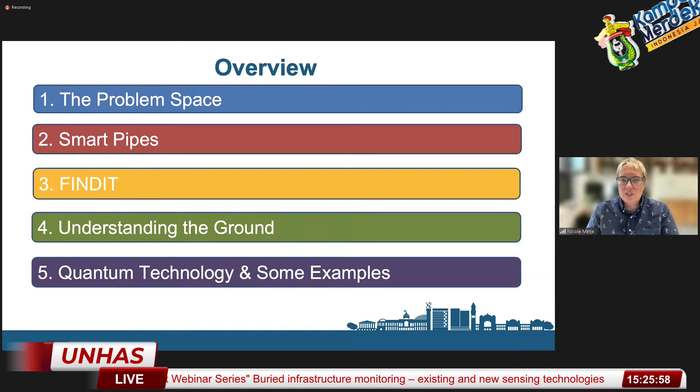But finally, coming over to my actual talk - I start off with the problem space, trying to explain what I'm interested in, because not everybody might appreciate what it looks like below the ground surface. Then I talk about a project we did a few years ago called Smart Pipes, where we looked at using existing sensors in a completely different way. We then did something called FINDIT, which was quite a clever play on the acronym, but again, it was about finding buried infrastructure.

But it's not just the infrastructure itself, it's also trying to understand the ground. And I'll finish off with some examples on the quantum technology sensors that I'm involved with.

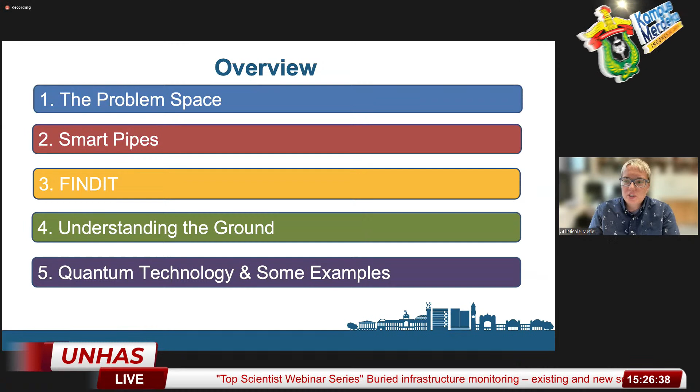But let me first start with what the subsurface looks like. If you go back to 1500, Leonardo da Vinci said that we know more about the stars above us than we know about the ground below us. This is still true today. That hasn't changed. So we are 500 years on, and we still know more about space, the cosmos, than we do what's below our ground.

And I'm one of these people who tends to take pictures every time there's an excavation. These are some of the pictures I've taken over the years. This is just focusing on pipes, and my research is much broader, looking at other things that are in the ground. But if you look at the pipes below there, you can start to appreciate how complex this is.

So if we go back to the medical analogy, none of these pictures show keyhole surgery. They actually all show really invasive surgery, i.e. we're opening the ground. The problem with this is that you're incurring quite a lot of problems at the ground surface, because it generally means these pipes and cables are laid in the street. So you have to close your roads, you have traffic jams, congestion, cars driving down roads they're not really designed for, causing secondary problems.

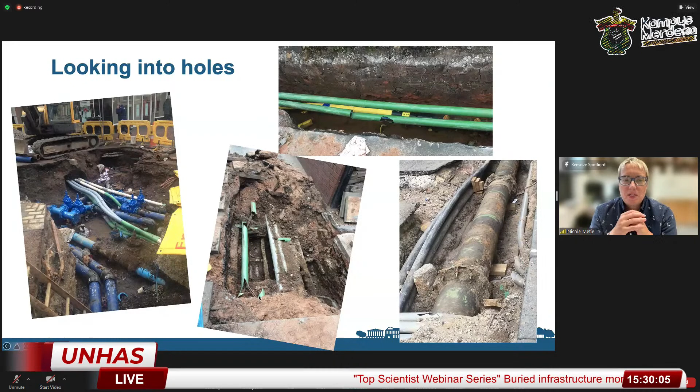The problem with that is we are currently in the UK rolling out a lot of our broadband fibers. The way broadband fibers are rolled out is they are blown into the conduit, into the duct. But you can't do this if you've got this offset. You can't just blow the fiber down. So you have to do that excavation like they've done here. You have to repair it, close it up again, then try and put your fiber in. But that can be quite complicated. The FINDIT project specifically focused on exactly that.

The other problem you see here, this is actually a gas pipe. So this is actually quite scary. This is a gas pipe, but you also see the surface here, this is the pavement. So you see how shallow the gas pipe is buried here. That means if you do any excavation, you really have to know very accurately where your buried assets are, because otherwise the risk of damage is significant.

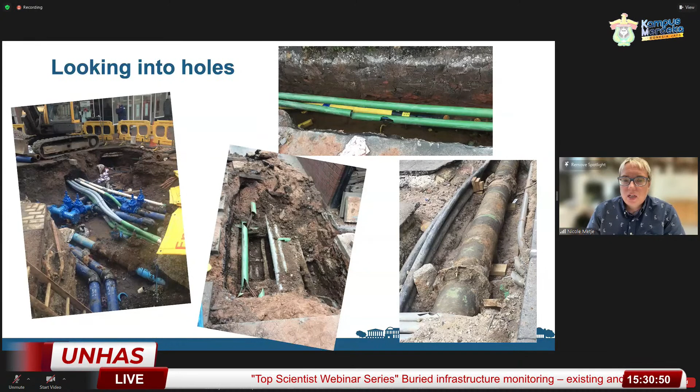And actually, in the UK, unfortunately, we know that around 5 to 6 people lose their lives or are seriously injured every year because they damage or hit a buried asset. So that's a really sad fact, and we really want to avoid that going forward. But you can also see these cables are electricity cables, and this is gas. So you don't really want those close to each other.

So you can see how in practice, this is not how it was designed, but in practice, people actually lay it. There's just a bit of brick, a bit of wood to just separate those out as much as possible. Clearly not a good way. You can also see here are some more conduits that are just broken off when that excavation happened.

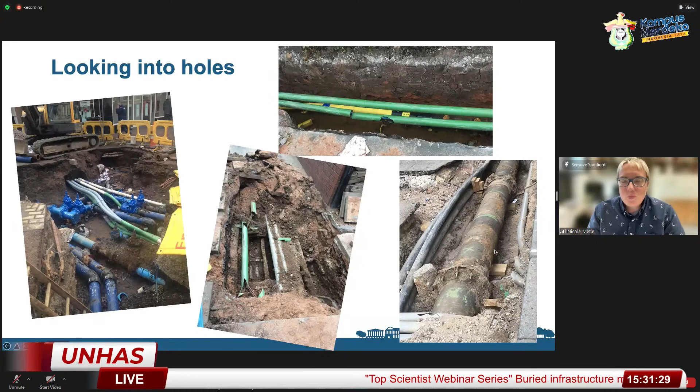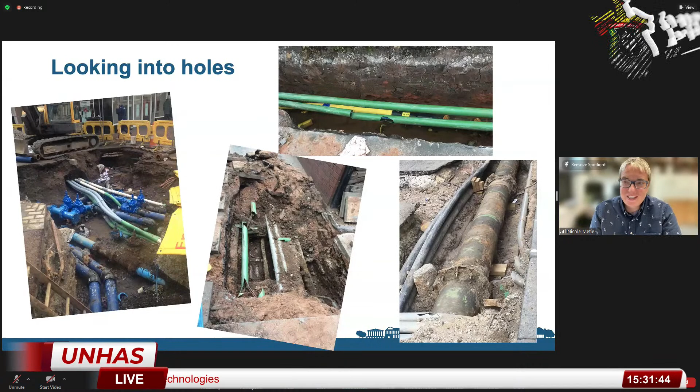So I'm one of these people, wherever I am, in whatever country I am, I take pictures of holes. That might not be a good fact about me, but I do it because I want to see whether it's different in other countries. I'm sure maybe you can send me some pictures of what it's like in Indonesia for some of the excavations.

But coming back to my pipes - this is a district heating pipe. It doesn't actually matter what it is, but most of our pipes are in the ground. Even the newer pipes we lay don't have any sensors on them. We call them a dumb pipe - they don't tell you anything about how they behave or where they are.

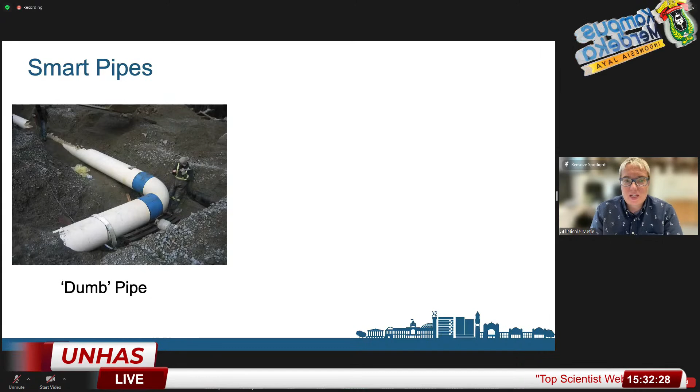Most of our pipes in the UK are actually 100+ years old, and this is where we are now starting to struggle with condition management and trying to look after them. So one of the projects we did, we said what we really need is to have sensors on this, because we need to be able to monitor the performance of our buried infrastructure, ideally from the surface without having to excavate, so we can make our assets last much longer, or intervene much more proactively before any severe damage happens.

So we said what we need is to add sensors and add communication. The principle of what we came up with is that we have our pipe in the ground, we've got our sensor nodes, and they can communicate with each other, but they also communicate to a master node, which is probably also in the ground or just above the surface. That then communicates to a cloud and can send you information out.

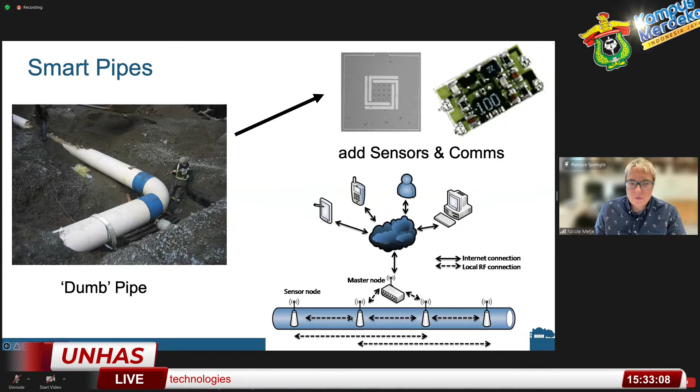The key idea was that if these can communicate with each other, we only send the information to the master node if a change happens. So if everything is in the green zone, we don't even inform anybody that there may be a problem. We record the data, but we don't pass the data on. So that was the theory.

So what did we do in practice? We developed something, but we had a few requirements. We wanted a sensor that was non-intrusive to the pipe structure. What we mean by this - if you've ever seen a pressure sensor, it's a tapping, you actually screw it into the pipe, which damages the structure of the pipe. We said we don't want that.

We needed something that has enough accuracy. We needed something that was simple from a signal processing viewpoint, which had a wide range in terms of communication, but also was low cost.

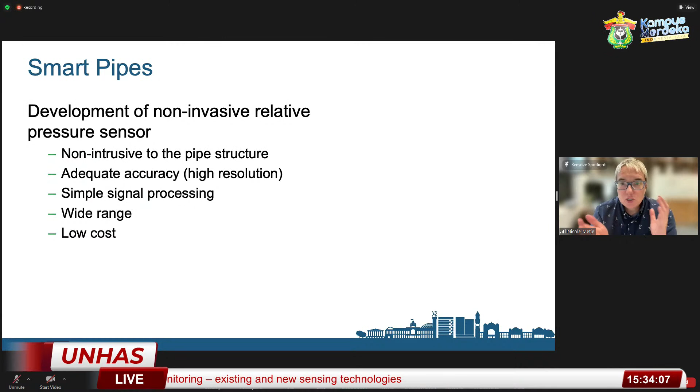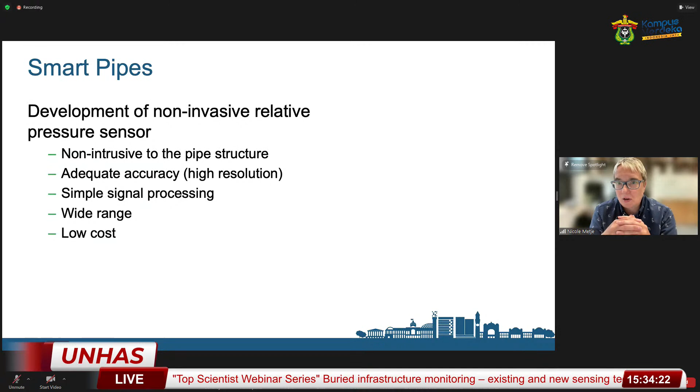Because one of the challenges we have in the UK is that water is cheap - that may change with climate change now, so this may all change in the future, but at the moment water is cheap. I mean gas is no longer that cheap, but certainly water is cheap. So if you add sensors and they cost hundreds of pounds or hundreds of dollars, it adds a significant cost to the supply of your water, and water companies wouldn't want this.

So what we basically found out is you can have a force sensitive resistor, or FSR sensor. The blue one is our pipe, which has pressure because you've got pressurized water in the pipe. You have a sensor and you have a clip on the outside. The sensor was very simple.

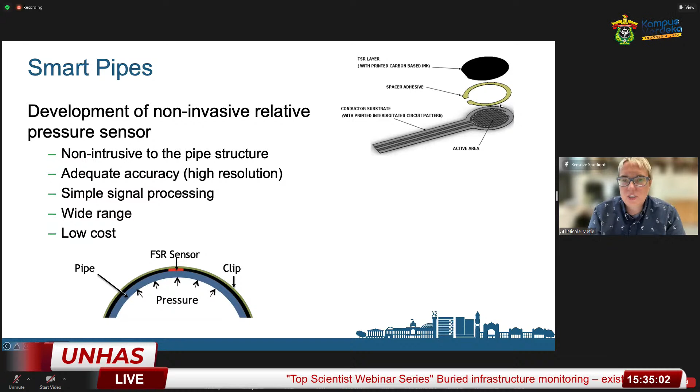This is what the sensor looked like. It has an area here which basically has a layer and a spacer, so a conductor. When it presses down, it connects your conductors and you've got some electric current running through, and you can measure this electric current.

So in practice this looked something like this. This was in the laboratory. We had a so-called Jubilee clip, just a strap around the pipe, and we had a sensor just underneath here - this bit is the sensing area, not the bit that you see at the back. So that was the principle.

These FSR sensors cost less than $1, and we didn't need to do any tapping. The only challenge is that you need to reach the whole circumference of the pipe, but we looked at alternative solutions for that as well.

One thing we did is we didn't just do it in the laboratory, we actually also did it in the field. The one thing we didn't practice or try in the field, and it's still proving a bit challenging, is that we still had a cable. We still had cable connections. In an ideal world, we want this wireless.

So we worked with one of our water companies, and in this case, we actually did a bit more for keyhole surgery. This is a vacuum excavator, which basically sucks the soil up into its drum, and otherwise it either takes the soil away or it most likely puts it back in the opening.

So here you can see the pipe, and you can just about see the cable clips. As you can see, you've got water because it's quite wet in the UK, so you've got the cable clips attached. One of the key things is we had our pressure sensor, but we also had some temperature sensors, one very close to the pressure sensor on the pipe, and one further in the ground. We also had some vertically in the ground as well.

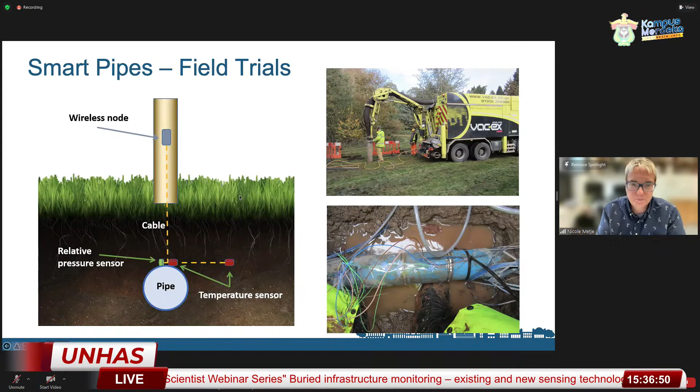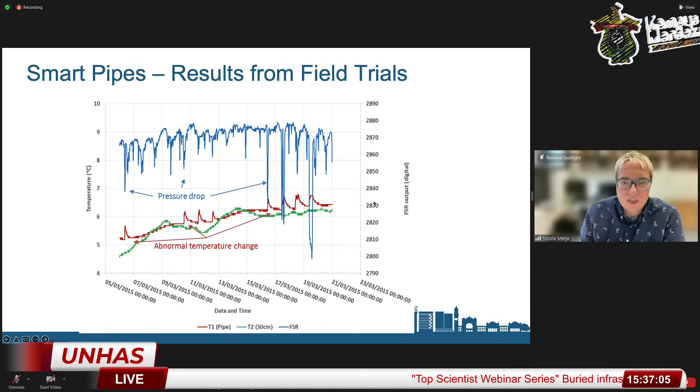So what this shows is a slightly complicated figure, but I'll try and explain this. On the x-axis here is time. On the y-axis here is temperature, and this is the FSR output. There's just a digital output, don't worry about the units. It's just literally what comes out of the digital converter. So it doesn't simulate a pressure or anything like that — it's not converted to pressure, that's what I'm trying to say.

So what you can see here, the green one is the sensor that was 30 centimeters away from the pipe — so the green one is this one. And the red one is the one that's on the pipe itself. And here you've got your pressure sensor, and you can see it's quite noisy, but it has these sort of drops every now and then.

The idea was that we could relate our pressure drops to whenever there was a change, an abnormal change in temperature. You can see there's a temperature change, and this occurs because when you have a leak, the water rushes through and you get different temperature water in the pipe. That's why you get a slight temperature change. The idea was that we could combine the temperature change with the pressure signal.

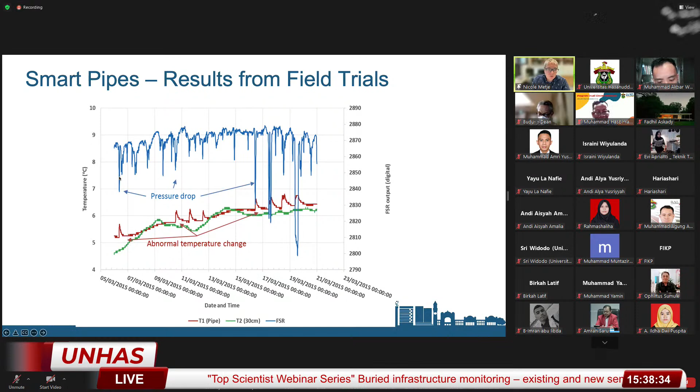So whenever we had a temperature change as well as a pressure drop, those were the times when there was a leak. So we induced a leak into the system, and we could measure this. And this was actually really successful because these points do actually show at times when we induced the leak. So whenever there was an abnormal temperature change which also coincided with a pressure drop, that's when the leak was that we induced. That gave us confidence that this system worked.

So as part of this project, on the sensing side, we developed this non-invasive relative pressure sensor — so it doesn't measure absolute pressure. If you want the actual pressure in the pipe, you still need a pressure tapping. We also developed a sort of node design, and we looked at an installation.

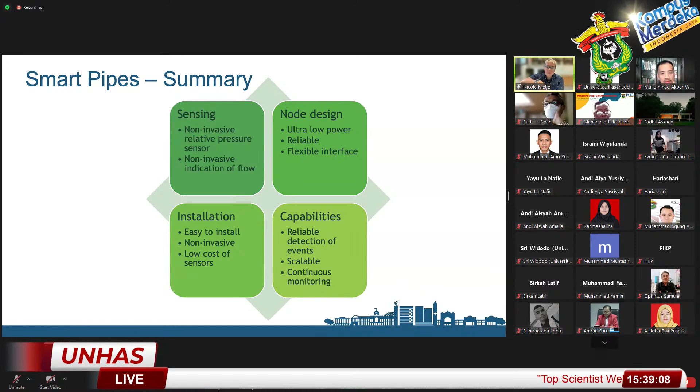So the Jubilee clip idea is really cheap, but we ultimately also looked at a clamp that we can put on the surface, so we can go in with keyhole surgery. We literally just have a hole rather than a trench. But it was really reliable, and it was cheap, and it was scalable.

Obviously, in the talk, I don't have enough time to go into a lot of details, so this is just a summary, and if anybody's interested, I can share these. This is just a summary of the various papers that we published based on this project.

This paper, our last one in 2018, is really the summary of our field trials, so if you're interested in the field trials, that's really a good one. Some of the sensors and actuator papers are looking more at the design of the system, but also how we can communicate through the ground.

One idea we actually had, rather than having something on the outside, is also whether we can include microchips or nano sensors into the pipe material itself. There's a paper here, and there are more than that one. This is our first concept paper that we did now 11 years ago. Most of these are open access, but if you're interested, as I said, I can hand them out, I can share them.

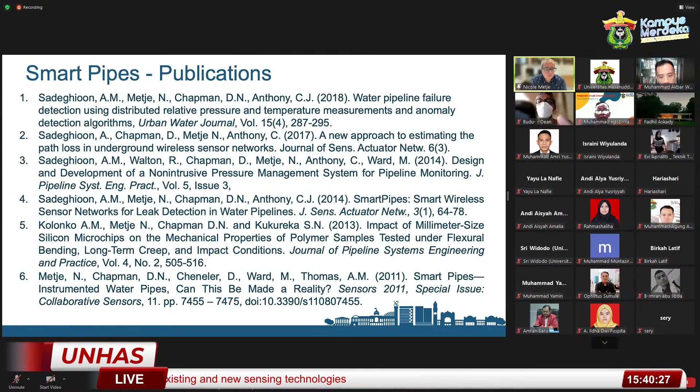Coming to the next project, which was FINDIT. That's something we did with industry, together with British Telecom (BT), as well as RSK and Geomatrix. This shows that we're really looking at industry problems and trying to address industry challenges.

I've already mentioned that in the UK we're rolling out broadband communication, putting fibers in and getting rid of the copper cables. But the way they do it is they open an access chamber, see the conduit, and try to blow it in with air, blowing the fibers through. That only works if there's no blockage in the conduit or no offset in the conduit.

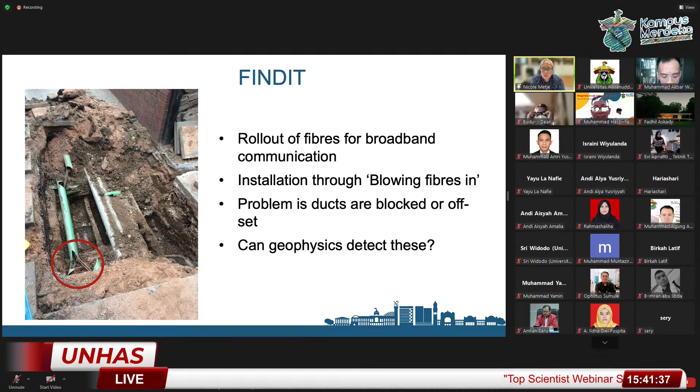So the question was whether geophysical sensors from the surface can help find any blockages or offsets, so that you can address this before you get on site and before you try to put your cables or broadband fibers in. I'll show you this video because I think it gives a good impression of what this was all about.

This is focusing in on our test site at BT.

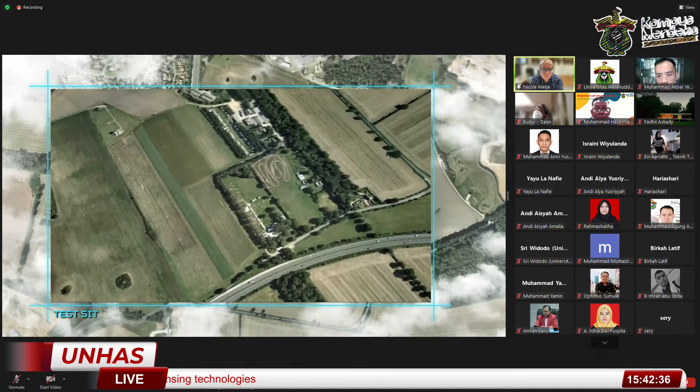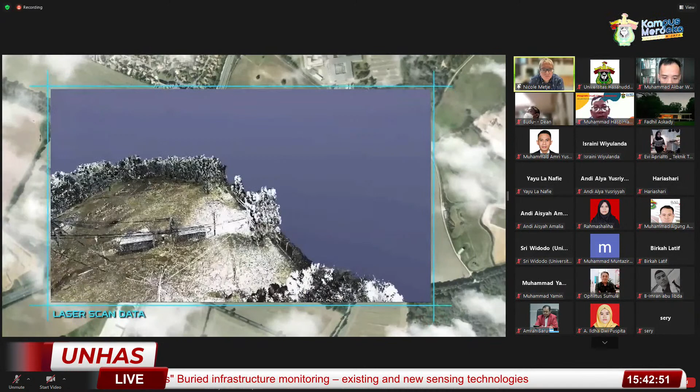One of the things we did was a laser scan of the area, so we have a good digital terrain model. This is just standard geophysical equipment we used to collect data on what's actually in the ground, because even though this is a test site owned by the company we're working with, that doesn't mean they know exactly where their buried assets are.

One of the sensing technologies we looked at was ground penetrating radar. You can see it move up and down—it's obviously a time lapse, so my colleagues don't move that fast.

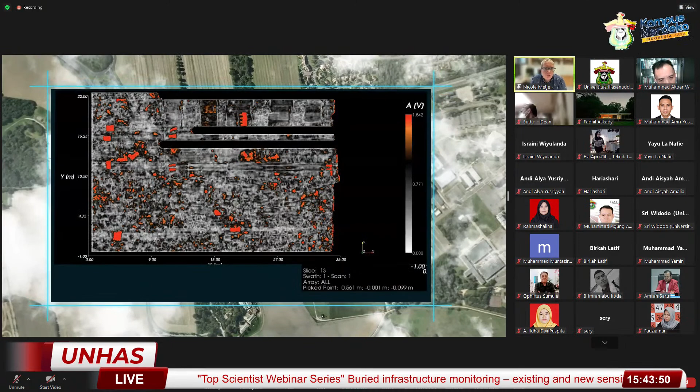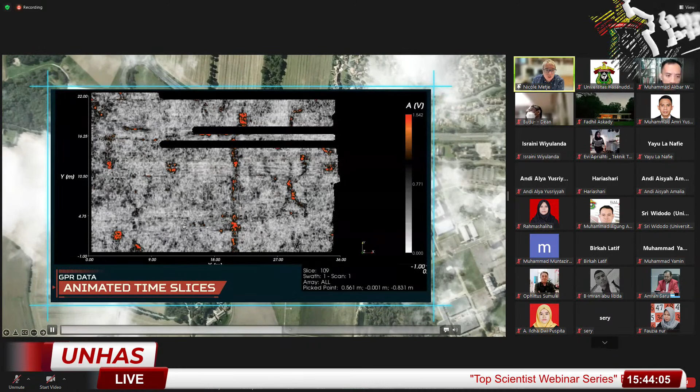Here are some of the results, and you can see how difficult it is. These are animated time slices that go through the different depth layers, and you can start seeing at different depths that some pipes appear—so there's a pipe, and there was one earlier which went along here, which you can just about still see. That's all the services that ground penetrating radar detected.

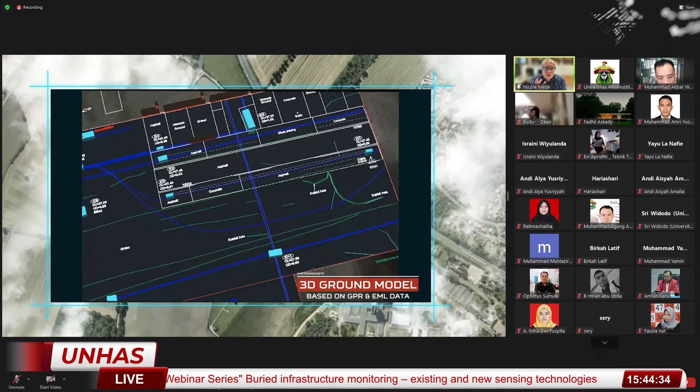We then did some CCTV, because one of the things we were interested in was looking at blockages. Since this was our test site, we needed to know what the status quo was so that we could benchmark against it—basically the ground truth.

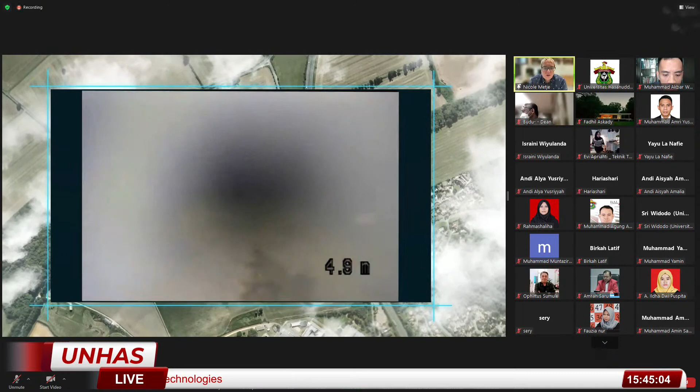So this is a typical CCTV image. I have to say these are very clean pipes—this is not the quality of image you sometimes get—but you can see that there's a partial blockage detected here by the CCTV camera.

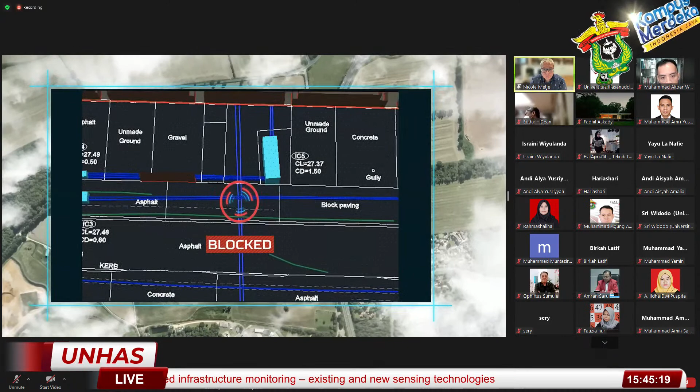So one of the things we then did was use the site itself and look at some blockages, but being in academia, we want to really have control over our tests. So we actually installed our own test site, with a total of 5 ducts with different defects.

One defect was an empty pipe, but we also had mobile partial blockages, which I'll explain on the next slide. We had some holes drilled in—some left open, some taped up—because if you have clay surrounding, it can actually feel as if you have a clay pipe, even if your main pipe is damaged.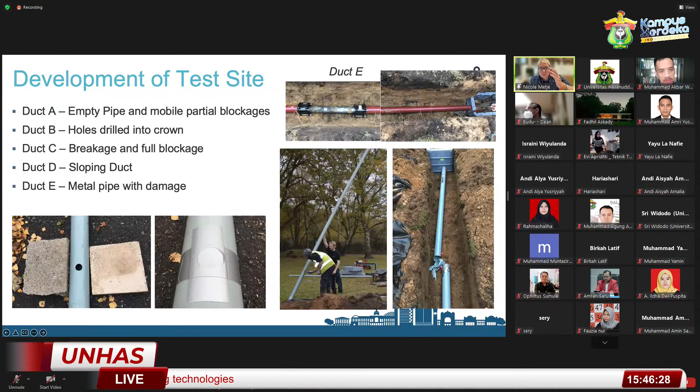We looked at breakages, something like this, to see whether we can detect this. We looked at changes in material, from plastic to metal, and we also looked at changes in depth. I should say the conduits are quite shallow in the UK—around 300 millimeters.

These were our partial blockages—we literally had cylinders filled with soil of different diameters. If this was our pipe, we literally dragged our soil cylinder through it, simulating different blockages at different positions. These were up to 60% blocked, and the idea was: can we still detect them from the surface?

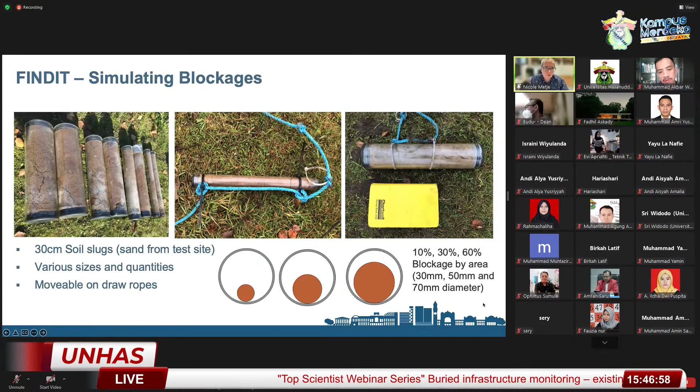As it says, this was 100% blockage. So the question was, could we also detect smaller blockages? We then did a bit more simulated data to see whether we can detect a smaller blockage.

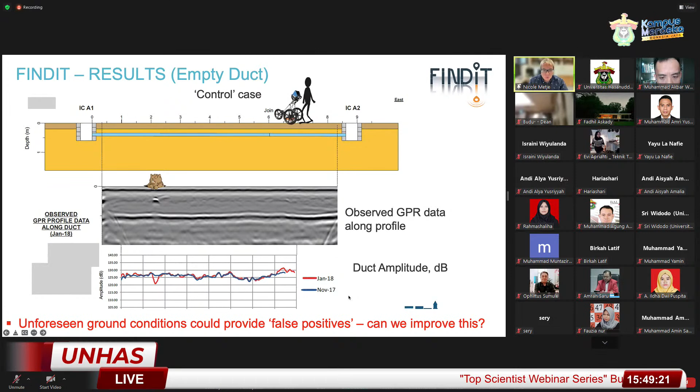We then also did some of the acoustic tests. The acoustic tests work slightly differently. You do need to have access to the end of the duct through a chamber, but you still don't need to excavate. You just need to get to the end of the duct.

As you can see, this is clearly not an industry prototype, this is a research prototype. You can see all the cables, but it's nothing really different to a speaker that we put at the end of the duct, a clever speaker and a clever sort of microphone, and we listen to the return signal.

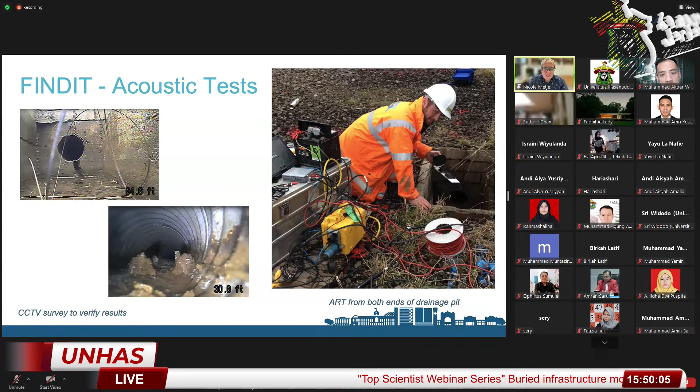We did this for quite a number of pipes. We also had quite a long one. This was at the surface to a certain degree for the proof of concept test. It doesn't actually matter whether it's in the ground or above the surface. What you can see here is quite a lot of connections as well.

And the question is, what can we detect when we do our acoustic survey? We had a bend as well.

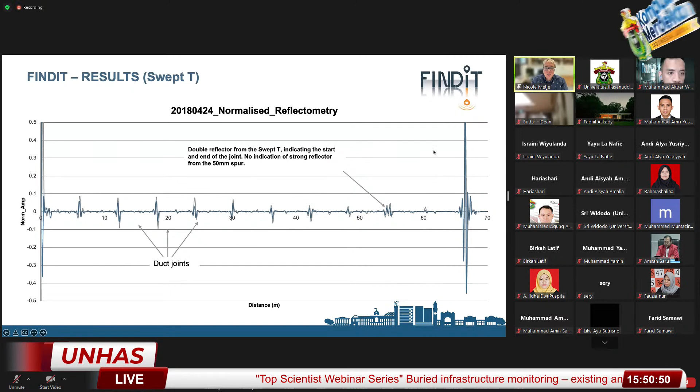There's a lot more in the technology that I don't have time to cover in this talk today, but you can see that you can detect the duct joints, so where it's joints, you can see this in your reflected signal. You can also see the end of the pipe as well. But this is just indicating that on this occasion, there was no blockage.

So the idea still is, if you go in before you try to put in your fiber and you understand the underground environment much better, you can either do repairs before you try to put in your fibers, or you know whether there is an issue. And this has a real advantage because you can plan your jobs much better.

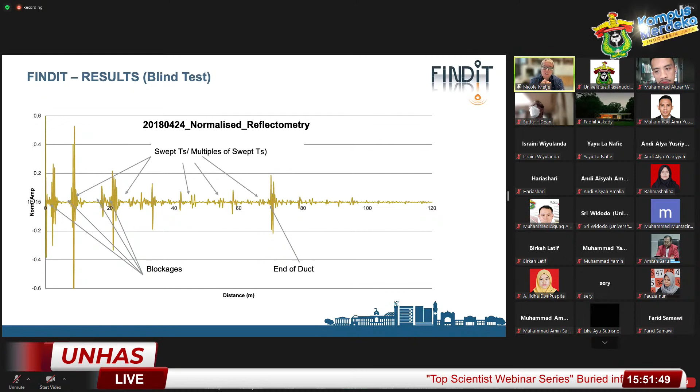The way it currently happens is somebody comes on site, wants to blow the fiber in. If they can't blow it in and there's an issue, they go away from the site, they call a different team in, the team repairs it, repairs one area, they go back, try it again. If there's another bit that's blocked, same situation, the person or team that tries to blow in the fiber goes away, brings in another team to repair.

And that takes a lot longer, causes a lot more congestion on the ground surface, and has a lot more impact on everybody driving around generally.

So to summarize what we found: we've got in-duct acoustics and ground penetrating radar. In terms of locating the duct, you can do that with ground penetrating radar - this is something industry does day in, day out. In terms of partial blockages, we can certainly see that with the in-duct acoustics, but we're struggling with the ground penetrating radar. If we have a full blockage, we can see it with both.

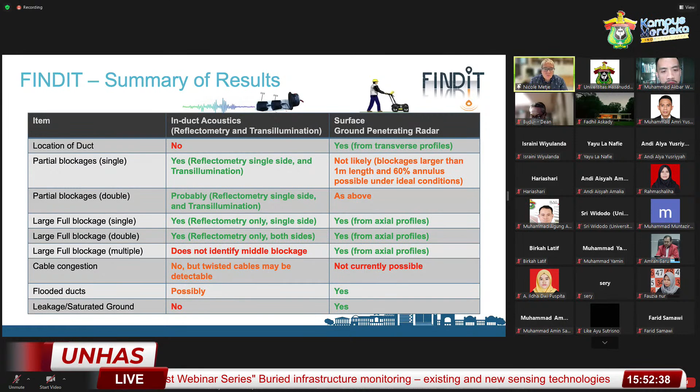If we have multiple full blockages - so you have a stretch of pipe with multiple blockages - we struggle beyond two in terms of our acoustics, but we can see it from the ground penetrating radar. If there's what's called cable congestion, so if you've got different cables and don't quite know how much more space is in your conduit, we again struggle with either sensing technology.

If we look at where there's water in the ducts, because that's also important, we can do that with ground penetrating radar. If we're looking at leakage, mainly for water pipes - this was a bit of a site analysis - you can also do that with ground penetrating radar. But what this shows, and there are a few images later, is that it's a sensing combination that's really interesting and useful, and not a single sensing technology that addresses your challenges. We've got a paper out, which is open access, if you want to read more about this particular project.

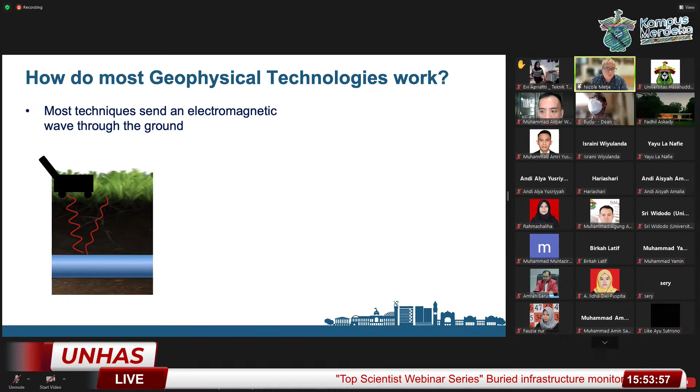Just going into how most geophysical sensing technologies work that I've been talking about. With ground penetrating radar, we're sending an active signal through the ground and looking at the reflection. The problem is that this electromagnetic signal is affected by the ground itself and by the condition of the ground, mainly the water. So if you've got water between your soil particles, that water can affect your electromagnetic signal quite dramatically - that's quite a significant problem.

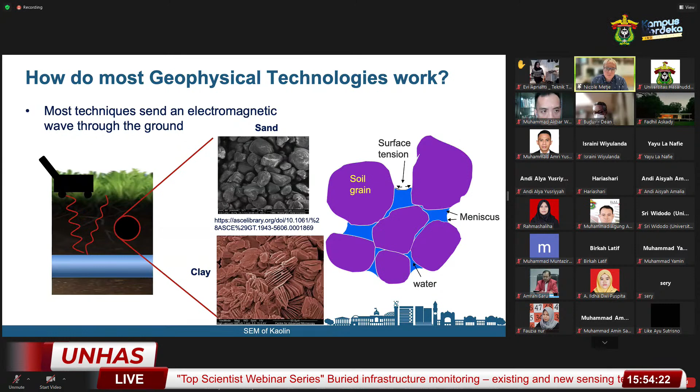It's really a problem because water is bipolar, a dipole, with electrons on the outside. The problem is that your electromagnetic signal has also got electrons on the outside, and they interfere, which basically means your signal can't penetrate so far into the ground.

As a result, one of the things we need to do is understand much better what our ground properties are - so water in the ground is really important. We've done quite a bit of work looking at different soils at different locations, both sandy coarse-grained soils and fine-grained soils. We've put in sensors called time domain reflectometer sensors, or TDR for short. It basically looks like a fork - a long fork, about 12 centimeters in length - and you poke or prod it into the ground.

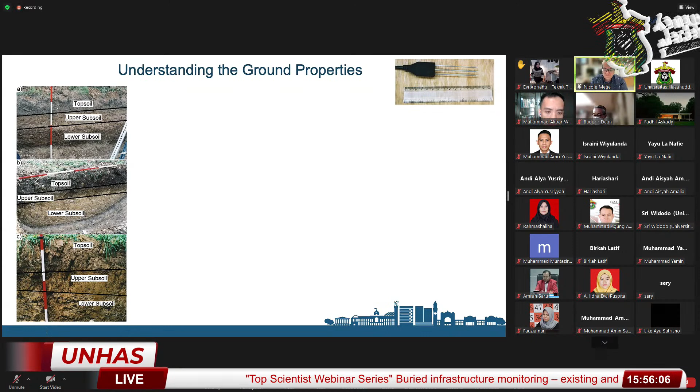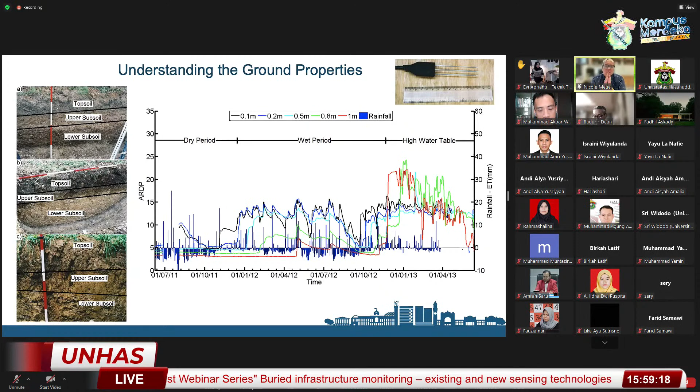I've got loads more information on these, so I won't go into that. This can be used as a proxy to give you in situ water content as a function of time. But the question is also, can we actually use this to detect leaks? Because what does a leak do? A water leak changes the water content in the ground, it makes the ground wetter around it.

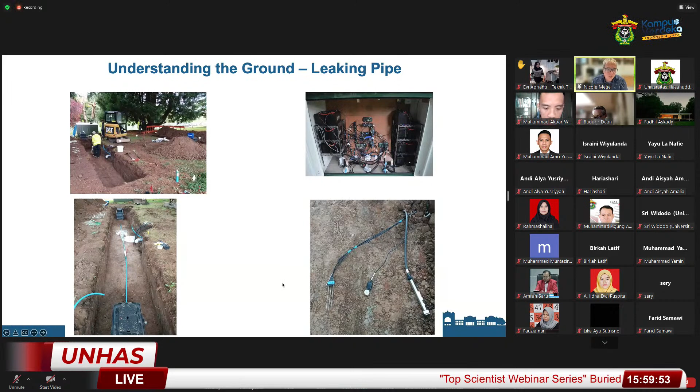So we use the same sensing technology. This is our simulated small pipe, a hose pipe, and we had a leak here. Here are our sensors, we used a range of different sensing technologies. We also did some laboratory tests to calibrate the sensors. We sprung a leak, this is just a trial. We actually did this while there was soil on top of it. And here are some results.

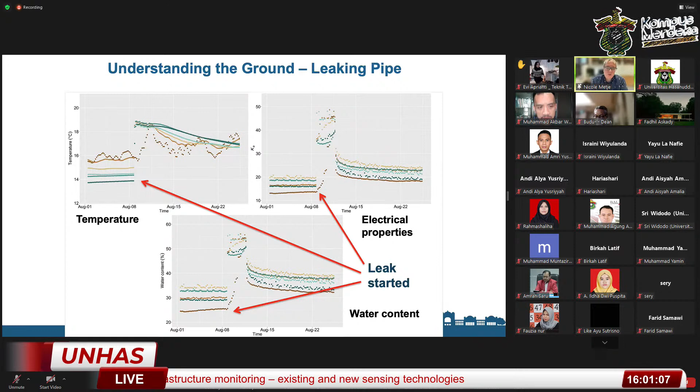This is really quite important because leak detection is a really vital aspect. I didn't mention it much about when we did the smart pipes, but water is precious, there isn't enough water in many countries. So having potable drinking water that leaks in the ground and we lose is not acceptable. Our water companies get fined if this happens, so they really want to know where their leaks are so they can go in and fix them. They don't want to know once the water's at the surface, they want to know before.

So finally, looking at the more novel geophysical sensors. A lot of this was existing geophysical sensors. Apologies, I just need to have a drink.

But even though there were existing geophysical sensors, it's not the way industry uses them. What we found is that there's a lot more information in the data from existing geophysical sensors than industry uses or gets out of it. We can actually work with the data and come up with some clever processing, clever modeling, and support industry to say, you've collected this data already, did you actually realize you can get this additional information that you can sell to your client? So in terms of our novel sensing technologies, it's really quantum.

Before I get to the quantum sensor, I'll talk about microgravity and the principles, because it's microgravity and gravity measurements that we do with our quantum sensor.

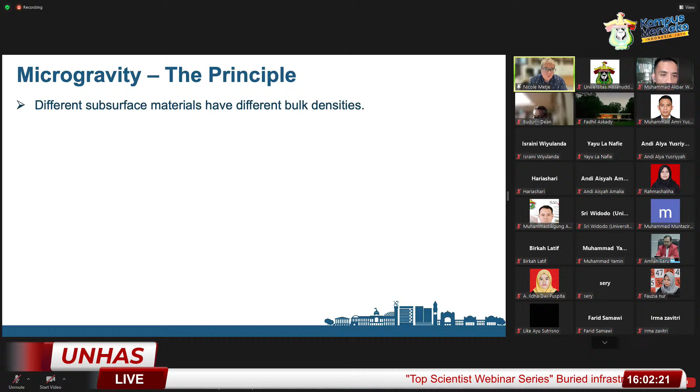One of the issues I've already mentioned is the soil. Different bulk densities potentially cause problems with a lot of geophysical sensors that rely on an electromagnetic signal going through the ground. In contrast, microgravity doesn't send an active signal through the ground—it's not a sensor you put at the ground surface that sends a signal through. It just measures the acceleration, or gravity, as a result of the Earth's gravitational field.

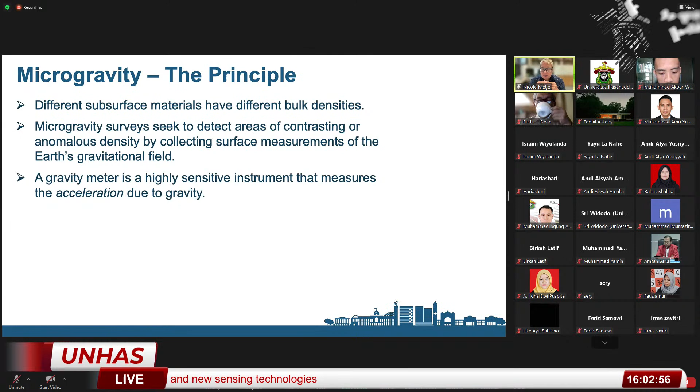So what does that mean? We normally have a highly accurate measurement that measures this acceleration. Classical gravimeters rely on a mass on a spring. If you have a dense material in the ground—think maybe a concrete foundation—your mass is attracted by that more. It expands the spring, and we can get some information about the acceleration.

If you have a void in the ground—could be a tunnel, a cavity, a big gas pipe—there's air compared to soil. So if you're over an area where there's a void, your mass is attracted less, and you actually have a negative gravity anomaly.

The problem we have with the classical instruments is twofold. One is that spring constant—it's very difficult to make them really accurate and all the same if you have a number of different instruments. The other thing is, if you've ever used a spring, maybe for structural analysis, you know it's affected by temperature. It dilates if it's hot, contracts if it's cold. That's problematic if you want to use the instruments over and over in different weather and climatic temperature conditions. The other challenge is creating test masses that are absolutely identical from one instrument to the next.

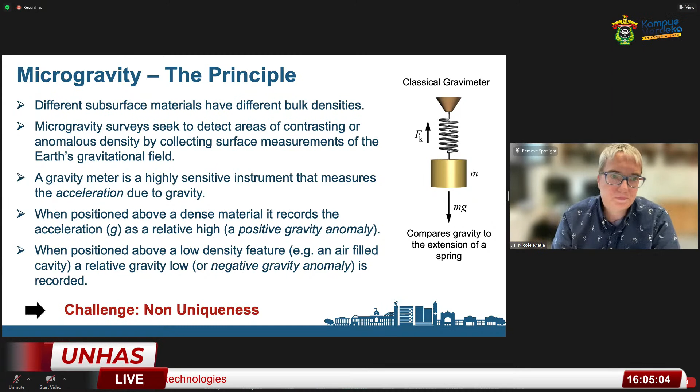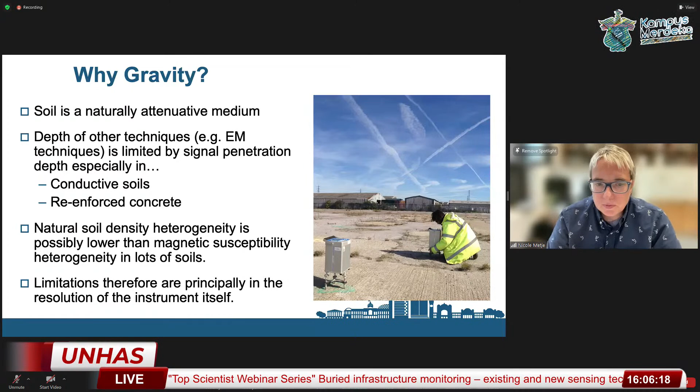But if it's so challenging, why do I do gravity? Well, sometimes gravity is really the only sensor I can use because my soil is an attenuative medium—meaning the electromagnetic signal strength will reduce with depth. The problem is that with ground penetrating radar, I sometimes might only penetrate a few centimeters. We also have quite a bit of variation in the ground, which makes it difficult with other sensing technologies, and it's often the resolution that is the problem—what's the smallest object I can resolve with the different sensing technologies?

So how does a quantum sensor work in contrast? It still uses Newton's principle of a falling apple—we're still looking at that gravitational pull, but it's doing something a bit more clever. It's using the quantum effect. And what does the quantum effect say? It says that a particle, an atom, a molecule, can be at two different energy states at the same time.

You may have seen, if you've ever typed quantum mechanics or quantum effect into Google, a cat that is either alive or dead, as it's often symbolized. It's the same here—the atom can be in two different energy states at the same time. So what do we do in terms of our gravity sensor?

We're actually doing something slightly more clever because we're using a gradiometer. We have two atom clouds separated by a certain distance, and we look at how these atom clouds behave, and then we take the difference. The advantage of this is that some of the common noise sources, like common vibration, get suppressed. So if my two atom clouds move in the same way, then any common noise sources, when I take the difference, just disappear or are suppressed. That is a real significant difference compared to a normal gravimeter, where I have to take into account noise sources.

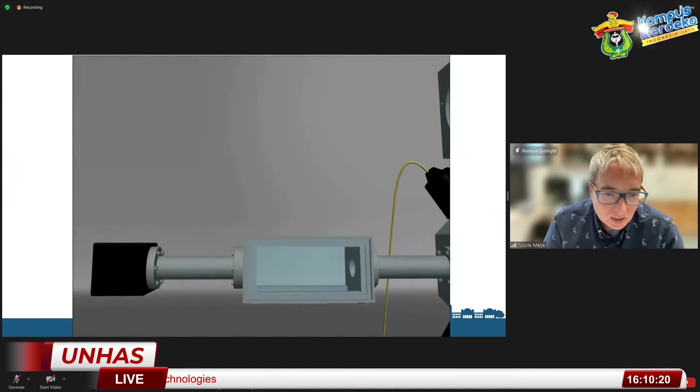Just to give you an idea, this is a slightly older schematic, but it shows a bit about what it looks like. We start off with our rubidium atoms. We put them in our vacuum chamber because we don't want a lot of kinetic energy. We cool them down so they have really low kinetic energy. We then throw them upwards. Here we give them a kick, they separate into their two different energy states. We give them another kick, they come back together. And we then use interferometry to measure the changes and ultimately measure or determine gravity.

So here you can see the new classical instrument called a CG6. This is a gravimeter on its own, but you can also stack it to get a pseudo gradiometer. This is not the same as the quantum instrument because they are individual instruments and each has its own issues, but you can still take a measurement from here and a measurement from there and take the difference. However, because they're not connected or aligned in the same way as a quantum instrument, it doesn't suppress the noise quite as well.

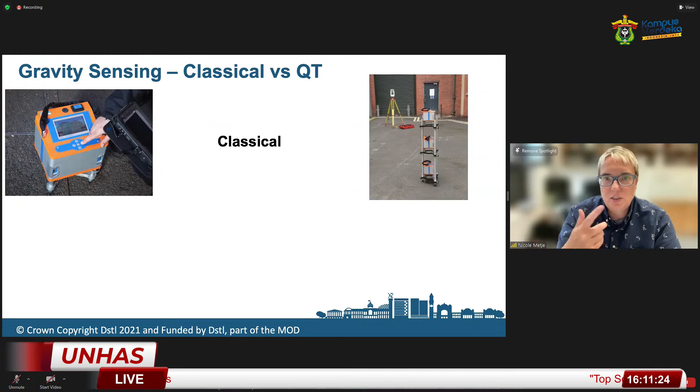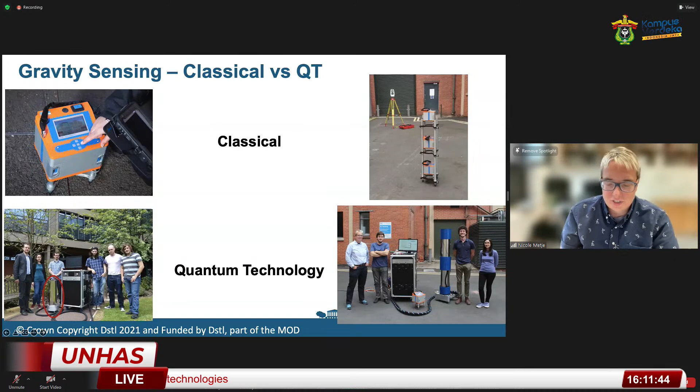Here are the quantum instruments. This is our gravimeter. This is our gradiometer - just a slightly taller sensor head. You see the people there, so you can see how much bigger it is. This is our classical instrument. This flight case hosts all the electronics. You'll see it in action in a minute.

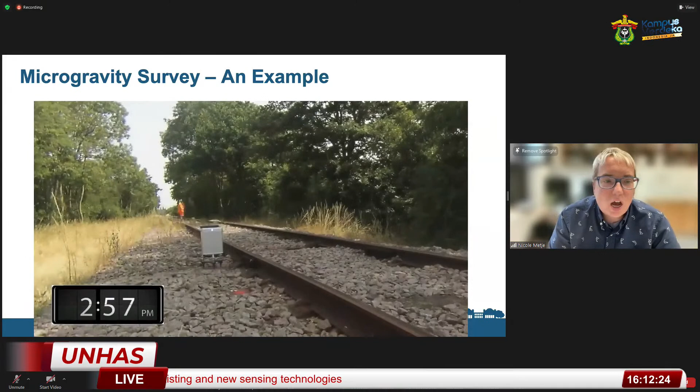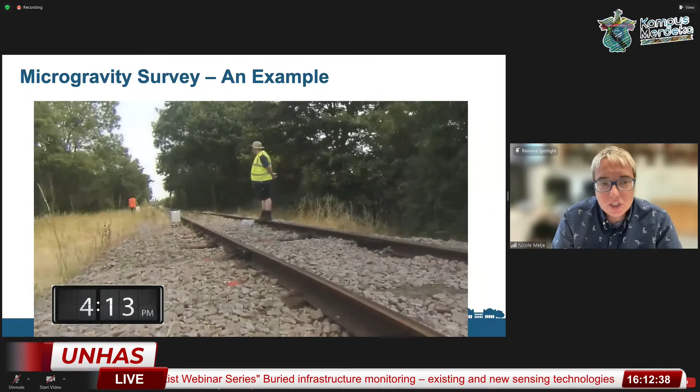So just to show you how slow a traditional instrument is - this is still our CG5. This is along a railway survey, mainly looking at the time, how long it takes. We've done probably about 20 meters in this video, and it takes over an hour. A lot of standing around. For each point, you have to take a number of repeat measurements because it drifts over time. There are issues with sensitivity, so you do quite a lot of repeat measurements.

The interpretation is basically: if you've got a gravitational low, it means there's some low density. If you have a gravitational high, there's some higher density.

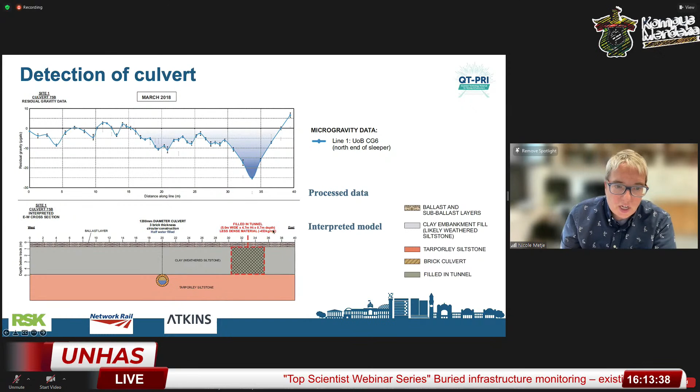But the problem we had here is that there was a feature that nobody knew existed - it was basically an underpassage or tunnel which was filled in with loose material and covered at the end, so you couldn't see it at the embankment, but it had a significant impact on our measurements.

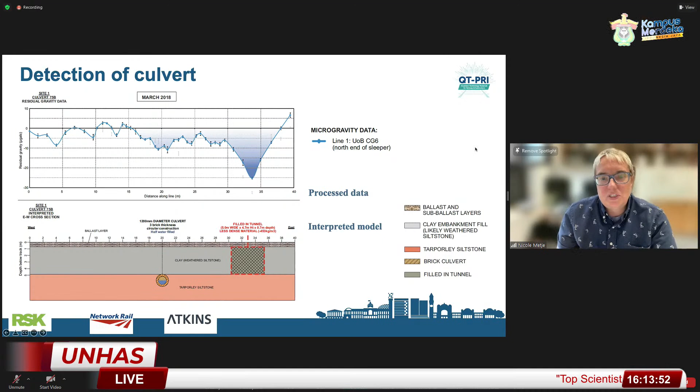The one thing we also looked at is whether we can use this technology to look at animal burrows. Badgers are a protected species, and if they are on your site it's a problem because you have to rehouse them. So knowing where they are is actually quite important before you get on site.

But we are now talking about a badger maybe this size - the burrows are, I don't know, 150 millimeters in diameter. It's stretching the capability of a gravity sensor, but it's also stretching the ability of a GPR sensor.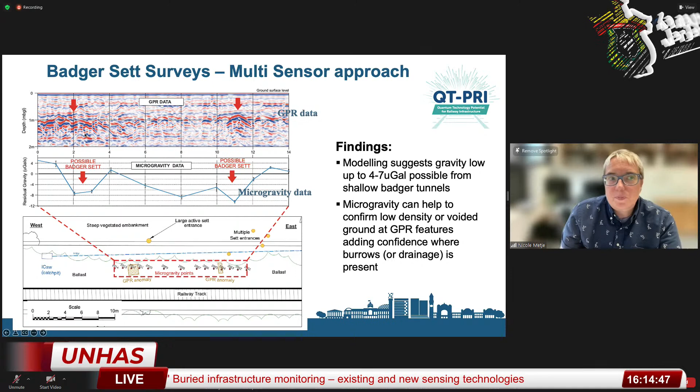So the top is GPR, very noisy. The bottom one is gravity. Again there's a lot of information on this slide, but really what we're trying to show is that it's multiple sensing technologies that help. Here you can hardly tell there's noise, but that could just be a variation of ground. Here, GPR possibly, but in combination with your microgravity, you probably could find - or you have more confidence in - the results. This is the same idea.

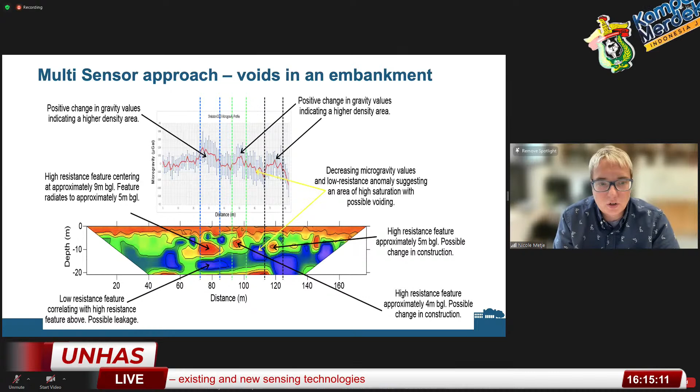I realize I'm getting a bit tight for time, but here we have done earth resistivity and gravity, and it gives you the same idea - combining two sensing technologies gives you a lot more confidence.

This was the world's first use of a quantum technology gravity gradiometer, which could actually detect a physical feature, a civil engineering related feature, in the ground, and we successfully detected it. But it also shows you've got an uncertainty profile.

It was really a significant achievement because normally these sensors are on optical tables in physics laboratories, so they are not out in the field.

What's the application? Ultimately, we want to develop maps - we want to use it for gravity cartography. So you can really look at water monitoring, can we look at aquifers, we look at tunnel monitoring, but also archaeology.

There's also a big drive about navigation where you can't use GPS, so you're using map matching. So if somebody's into navigation, there's quite a lot of work we're doing here.

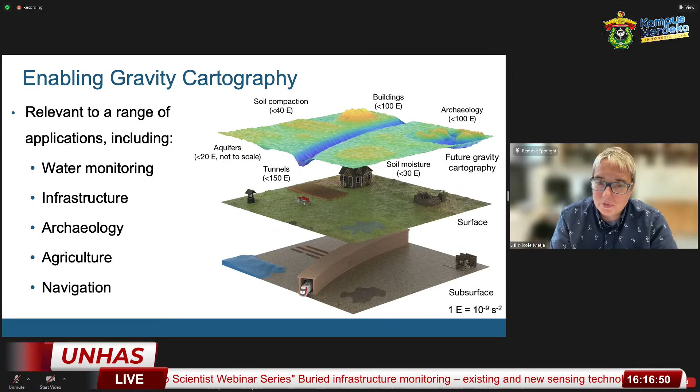In terms of our quantum work, there's quite a bit of work in the medical field as well on the quantum magnetometer that we're using to replace maybe your CT scans, and you can do a lot of brain imagery. That's not my field of expertise, but I just want to mention that might be something - I can certainly make the linkages that there's quite a lot of work in that area.

That work culminated in our Nature paper, which is again freely available, and you can see a lot more detail.

But finally, to finish off here, I just want to talk about our large scale test facility, the National Buried Infrastructure Facility, because it has twofold purpose.

It really gives us a large scale control test site to do a lot of our testing now. It opened last summer, so it's been open for close to 12 months. This is a really unique facility—there's nothing else in the world where we can do large scale testing, and the key is that we can do control tests.

We can control the material—normally we use a coarse grained material, so it's sand filled. We can also control what we bury and where we bury it. We can use lots of sensing technologies, both existing and novel new sensing technologies, and we can also control our environment and noise influences.

Here's a picture of the facility, I'll go through the images quickly. This is the center of the facility—you can just about see it here. It's what's called a movable floor, so the idea is you can simulate ground movement, whether as a result of tunnel operation, slope stability issues, or leakage. There are 50 actuators that can move up and down, giving a travel of 300 millimeters, and that's how you simulate ground movement.

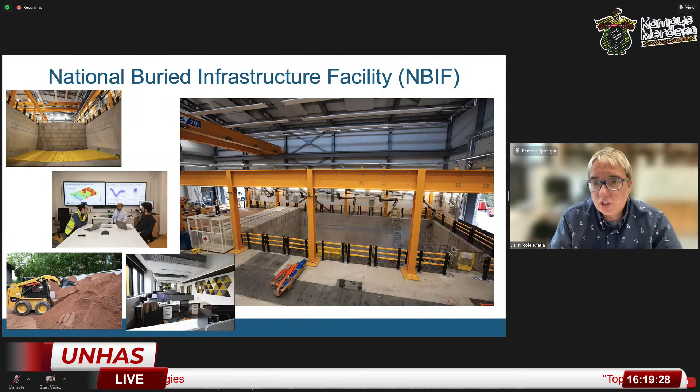We have a structural frame as well. You can see a visualization suite and meeting rooms, so you don't necessarily have to be in the country to participate in the tests and see what we're doing. It's basically a construction site, so we've got quite a lot of plant. We've got offices for our PhD students and research fellows, but also knowledge transfer offices—if anybody wanted to come over for a period of time, we have offices as well, because we appreciate that the day job continues.

We did a quantum experiment where we added a pipe to the system. First we had to close off the end bits because we didn't want soil to flow into the pipe, which was quite large, around 2 meters in diameter. We then filled the pit in 300 millimeter layers under very controlled conditions, compacting it very carefully. We used a nuclear density gauge, shown in that picture, to measure the density, giving really accurate controlled conditions.

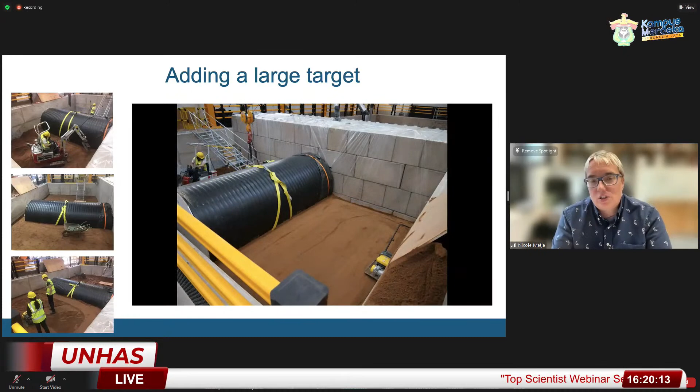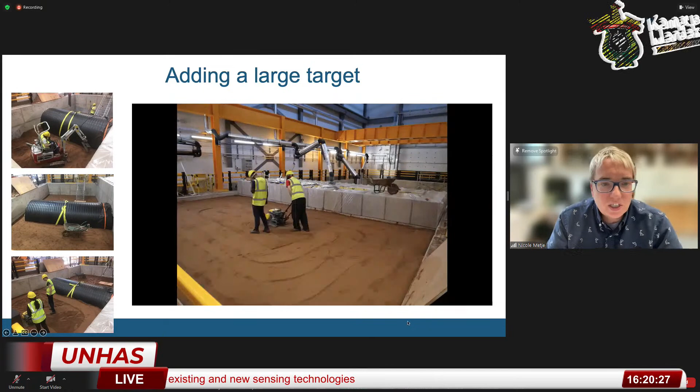This goes on—you can see we also buried a gym ball because we wanted a different target, ultimately filling all the way to the top. As you can see, quite a lot of people were involved in the process.

We then had our quantum technology sensor in the facility. Here you see the quantum technology bit in a slightly different guise—it's a bit further developed, so it looks slightly different than in the other pictures.

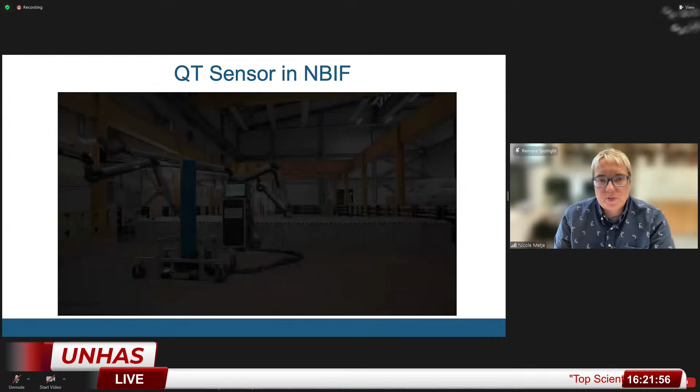As you can see, this is all part of our quantum technology hub at Birmingham. In the introduction it was said that I lead the geophysics aspect, the civil engineering aspect. What's really nice about the quantum technology work is that it's always been a collaboration between our physics team and our engineering team, and I think that's what allowed us to advance it quite significantly.

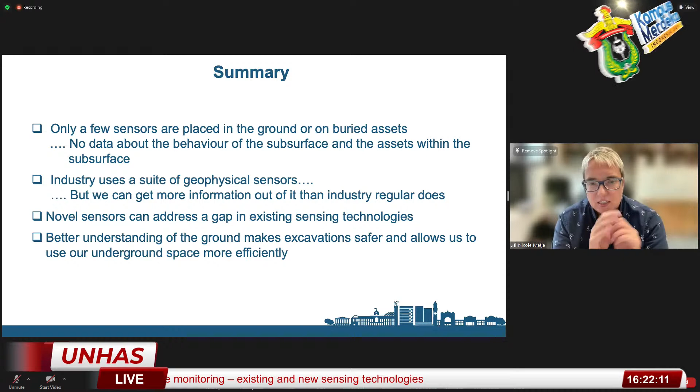The other thing with the quantum sensor—I should say the classical sensor is stationary, whereas the quantum sensor will have the ability to be ultimately mobile because you can sample much quicker. That will be a significant advantage, because one of the problems with the existing sensor is just the time it takes to do the surveys.

So coming to my final slide, as a summary on what this talk was all about, it felt a bit like a whirlwind about some of the research I've done over the last 10, 15 years. I'm more than happy to discuss anything in more detail if you want more information.

But in summary, basically the subsurface and the underground space is a really challenging environment, but it's also an opportunistic environment. We bury quite a lot of features in the ground - buried assets, pipes, cables, tunnels, basements, underground storage, shopping malls. The problem is that the ground really influences how things behave, and we don't really have a lot of sensors in the ground, which makes it quite difficult to manage from an asset management viewpoint.

So we normally use a sort of stochastic approach to predict the behavior of our subsurface assets, and that's not really a good way of moving forwards. The other thing is, with the onset of climate change, we're probably going to use our underground space more and more as well. It allows us to put things in the ground that we don't want to see above ground and free up surface space to make it greener.

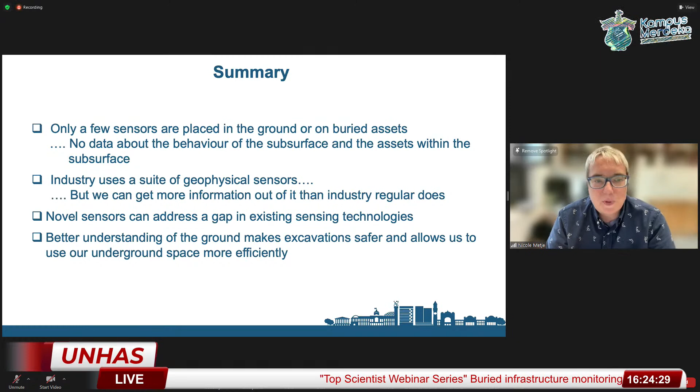For example, quantum technology sensors are one of the suites of sensors that you could use to look through the ground. But really what we need to do is have a much better understanding of the ground to make excavation safer, but also to allow us to use the underground space more efficiently in the future.